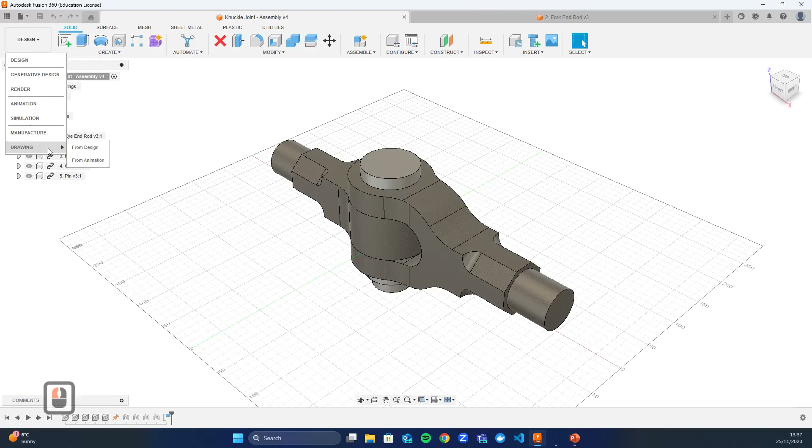For that, open the part, essentially the assembly, then go to design, and from there we'll be changing the workspace this time and going to drawing. You can see that you can make it from animation or design, but for now we'll just make it from the design. Let's click on design.

Then you see this dialog box, which asks you what do you want to make the drawing for. So we'll go ahead and click on full assembly. We'll be starting a new file. I have provided a template in the resources folder on the learning room, so you can use that.

It's called drawing dash template. But for now, I want to show you how to make it from scratch. So in this video, at least, I'll be showing you from scratch.

So there are different standards. We'll be using the ISO, we'll be using millimeters as dimensions, and for the sheet size I would recommend to use A3. So let's click on OK.

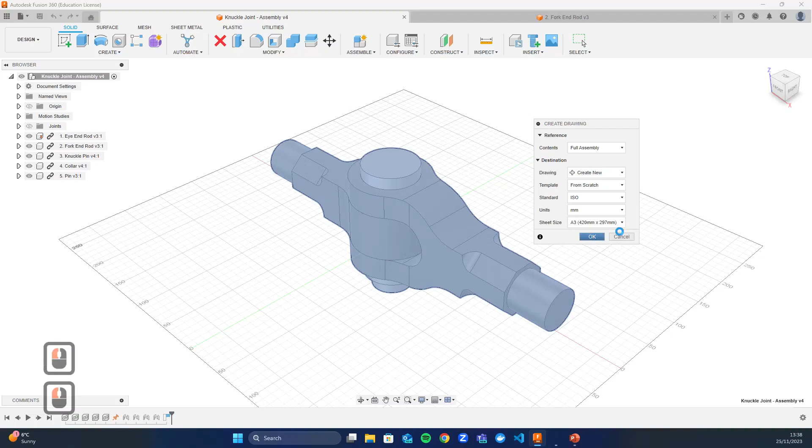One thing to observe is that Fusion opens a new file, an untitled file. So this doesn't actually happen inside the original design that you made, but Fusion opens a new file. And the very first thing Fusion wants you to do is to put the part wherever you want it.

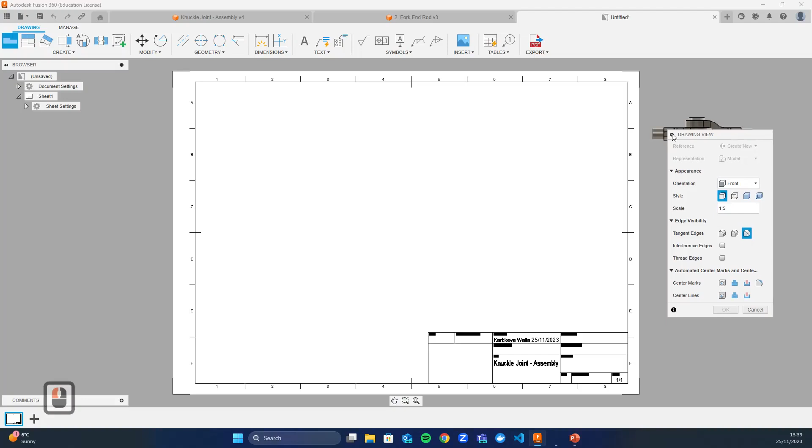You can put this view if you want, which is the front view, as you can see from here, or we can also change the view. So let's go ahead and use an isometric view for now. Let's see if we can use that one. That looks fine to me.

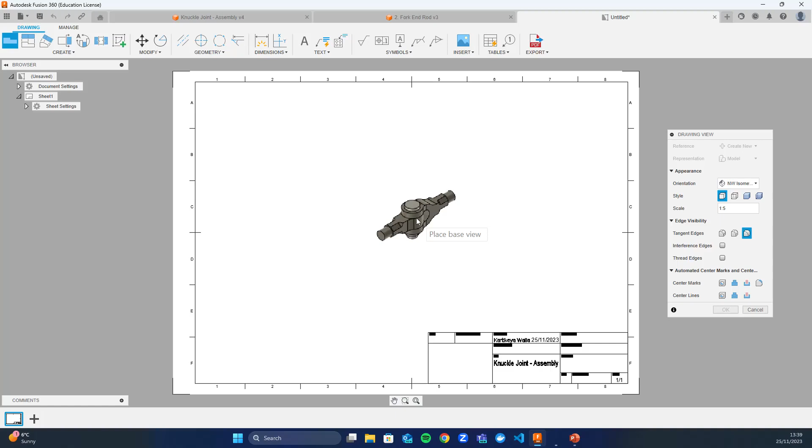Also, this is very small, right? Because over here, if you see 1:5, that just basically means that we are seeing all the dimensions 1/5 of the original dimension. So let's go ahead and do it 1:2. That makes it a little bit bigger. Looks good, so let's go ahead and click it.

Once you've clicked, the position is fixed, and then you can click on OK. Again, you can modify all of these things, so there's no worry that if you've done it once, you can't really change it. If you double click on that, that box comes back and you can go ahead and modify things. So just one thing to notice is that there are different kinds of styles as well that you can use.

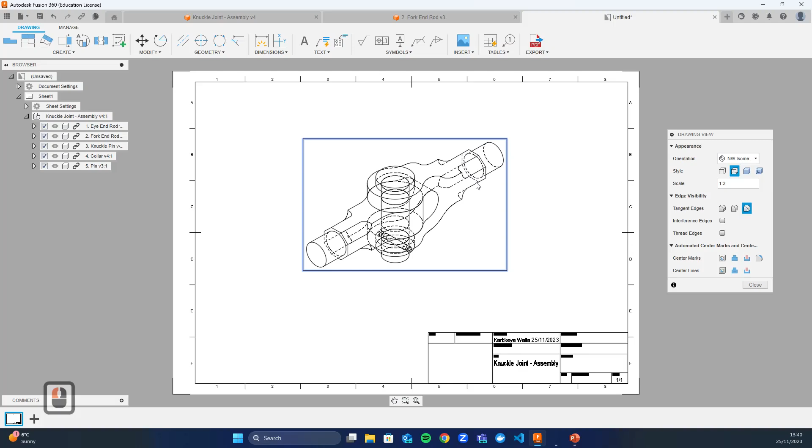We use the visible edges. You can also try visible with hidden edges, which for at least the assembly is looking very complicated. Then you can just do the shaded one, which is nice if you have some other views as well. And you can do visible and hidden edges with the shaded one.

For now, we will use just the normal visible edges. Feel free to explore the other options here as well. Okay, so let's close that.

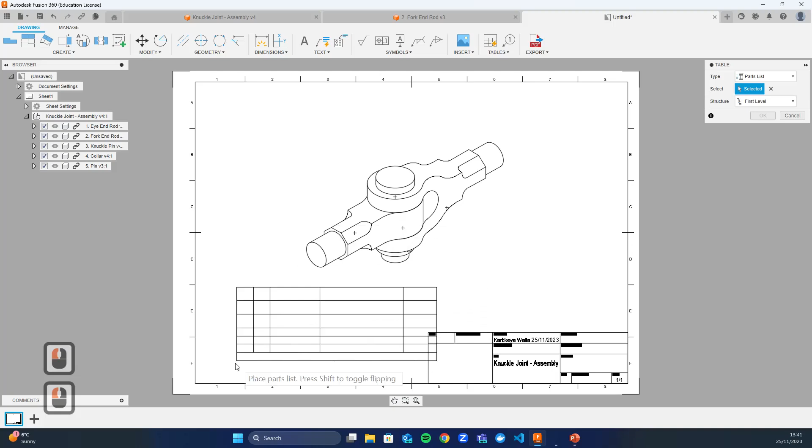The next thing we need to do is to make a bill of material. And for that, you can very easily click on tables, and from there you can select parts list. It basically hovers and sticks a table to your mouse.

You can click anywhere, and because we've been saving the files with the correct names, we have also assigned the materials. But right now you see that it's not — I think it's upside down. For me, parts list should be on the top. So we can fix that.

If you double click on the table, you see the parts list dialog box. You can set the table direction to down, which fixes that immediately.

If you want to write description, you can, but it's not required. Then you can show the mass of the parts as well, which is optional again, but I would suggest to have the item, quantity, part name, and material.

So let's get rid of some of them. We'll keep the item, we'll keep quantity. We don't necessarily need part number. We'll have the part name, which is exactly what you've saved the file names with. So maybe it's a good idea to change the names without these digits so that it makes more sense.

And you can also change where you want, like, quantity to appear, so you can have the part names first and then the quantity. You can close that, and also modify it a little bit so that it looks nice, and you can move it around. Very easy to do this.

The next thing you should notice is that it has put these balloons on the part, right? And these are basically showing that this item number, which is 1, is essentially this part. The second one is over here, which is the fork end.

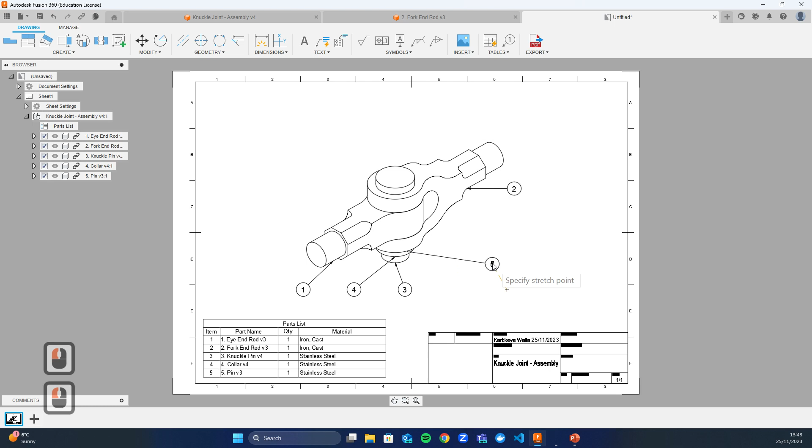Very easy, pin is marked, so 5 is pin. I like to keep them nice and straight. You can keep them at an angle, there's no problem to that, but it just looks better if they are straight.

Knuckle pin can be at the bottom, there's no real problem. So that is the assembled view. We'll come to the title block. This is called the title block, and I'll show you how to make that itself, but essentially I wanted to focus right now on the bill of material.

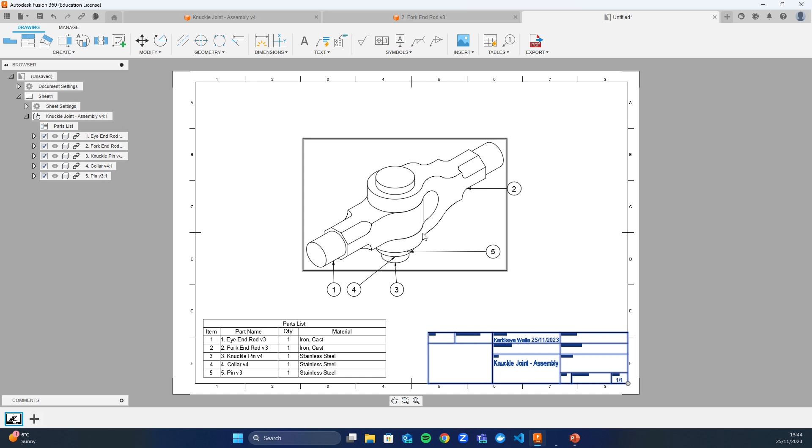Very easy to make if you've followed the process we've been doing, making all the parts separately, assigning the materials in the assembly. You've imported them by right clicking, and if they are linked, you should have no problems making the bill of material. If this doesn't work, you can always make a custom bill of material where you enter all these values yourself, and you can also put balloons and all that. So that should be very easy to do.

One more thing before we go to the title block is we can actually move this around, so that shouldn't be a problem, and we can import more views if we want.

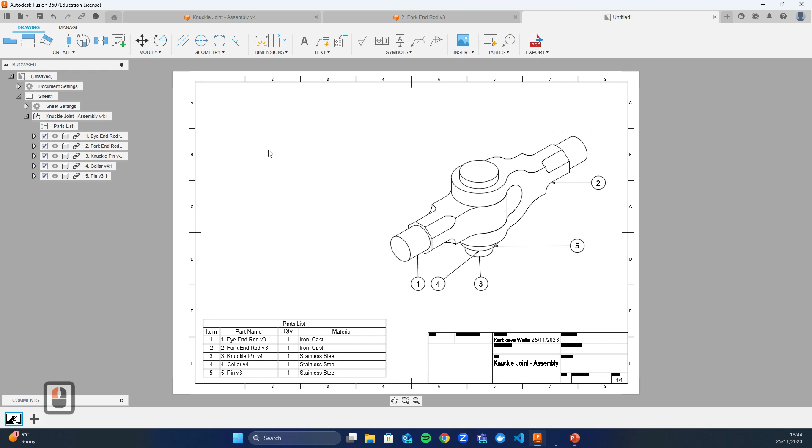For that, what we will do is click on base view, which brings up the initial sketchy view we got when we started a drawing. We don't necessarily need it for the assembly, we just need enough views that makes it clear that this part is that.

Sometimes it is a good idea to have separate views, but I just wanted to show you how to import it. So let's go ahead and make it 1:4. So this is the front view.

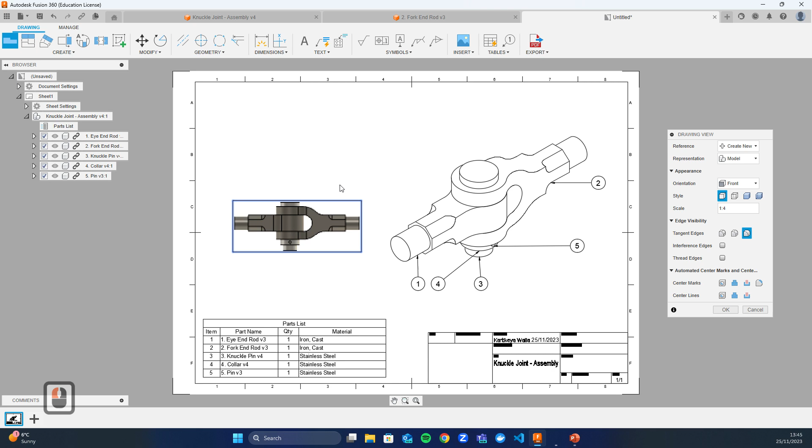If we are using the third angle of projection, this time let's do it with the hidden edges. And if you remember from the previous classes, if this is the front view, where would the top view be? Take a second and guess. So in the third angle of projection, the top view is on top.

If you want to make any view from an already existing view in your drawing, for example this, if I want to make a top view, what I need to do is click on projected view, and wherever I click next, the correct projected view will be put. So even if I go at an angle, I can have the isometric view as well.

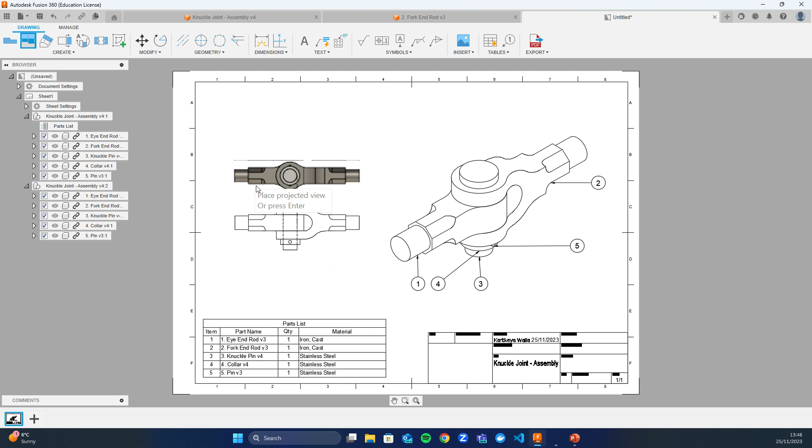So for now I'll just hover on to the top. Also make sure that it's aligned properly. Actually Fusion snaps it itself, so it shouldn't lose the alignment, but you get the idea, right? So you can make the top view just like that, and also the side views.

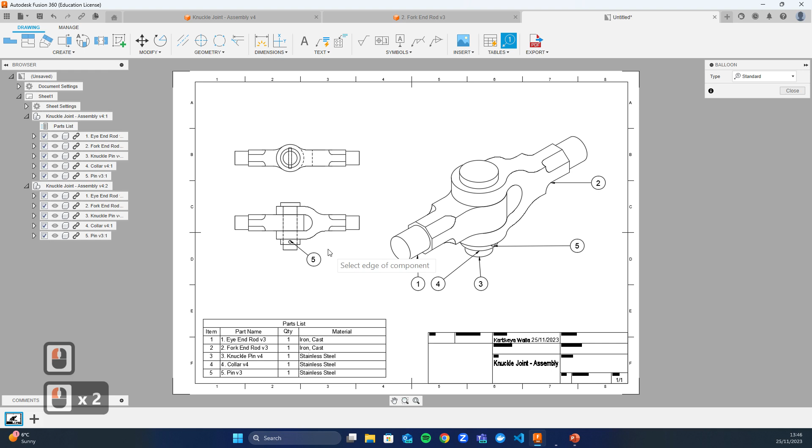You can put more balloons if something is unclear. For example, the pin is not very clear, so we can have another balloon which shows the pin very clearly. Feel free to explore this.

Without wasting any more time, let's go ahead and I'll show you how to make the title block. Title block is basically another table that shows most of the information about the drawing. We can modify this block, or we can start a new block. I have already given you a template, so if you want to make changes, you can just modify that. But I'll quickly show you how to modify an existing one.

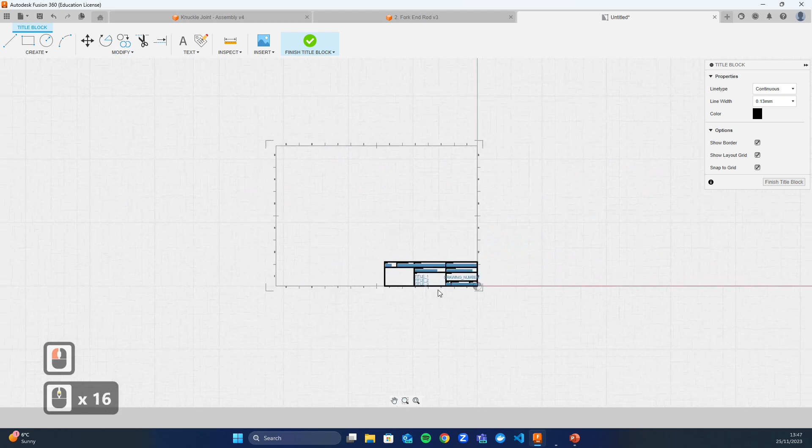If you right click on the existing title block, click on OK, it takes you into a design workspace where it's as simple as making lines. For example, if you want to add more rows, you can just click and add straight lines. If you want to import some images, for example a logo of Nottingham Trent University, you can do that, and you can change the scale of that.

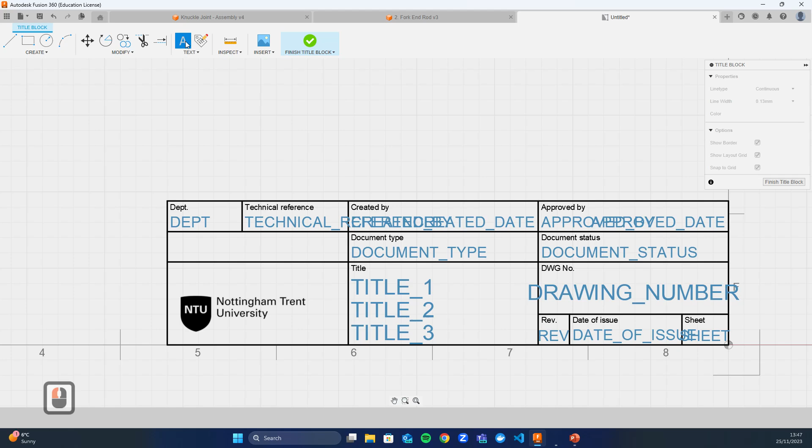And you can make changes as much as you want. You can write text, we can write the scale, yeah? So scale is another thing we should mention in our drawings, and we have used 1:2 for this case. So you can make changes to this. You can write the title of your drawing and then finish the title block, and the changes you made should appear over here, right?

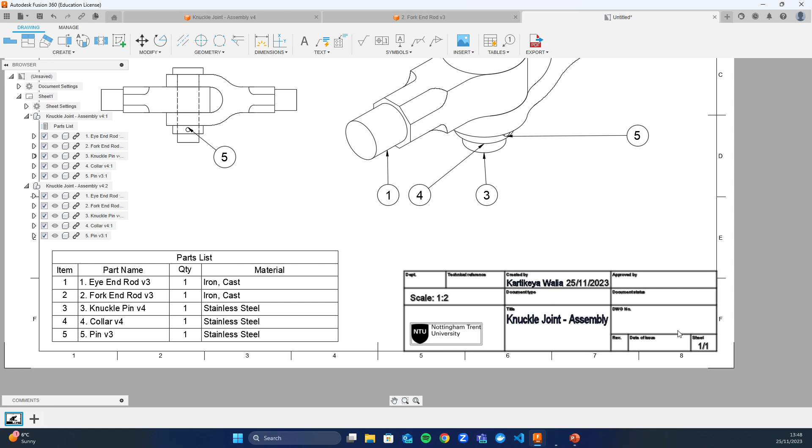Please make sure that you fill all of this information before you actually export the file as a PDF. So that's the final step. You can save the file, obviously, remember to save it, right? So I'm going to save it as this, and then you can go ahead and export it as PDF.

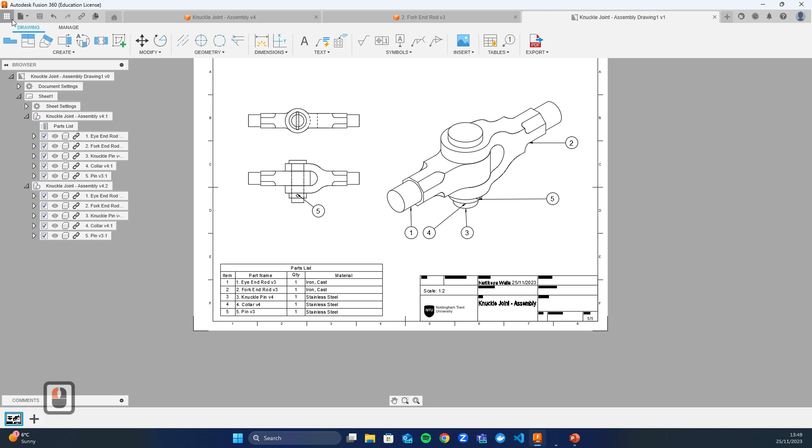I already did one before this, so I'll quickly show that to you. Yeah, so you see, I've got an isometric view as well, and I've got the three orthographic views. I've used, which angle of projection is this? Third angle of projection, hopefully you can remember it very easily now. This title block is already there in the template that has been provided, so feel free to use that.

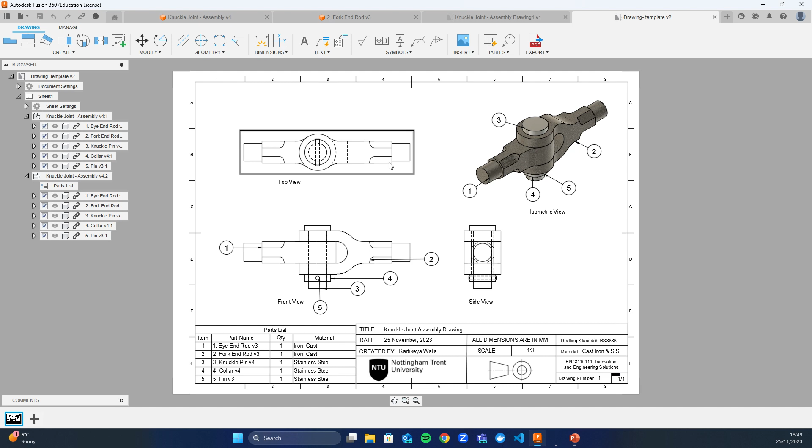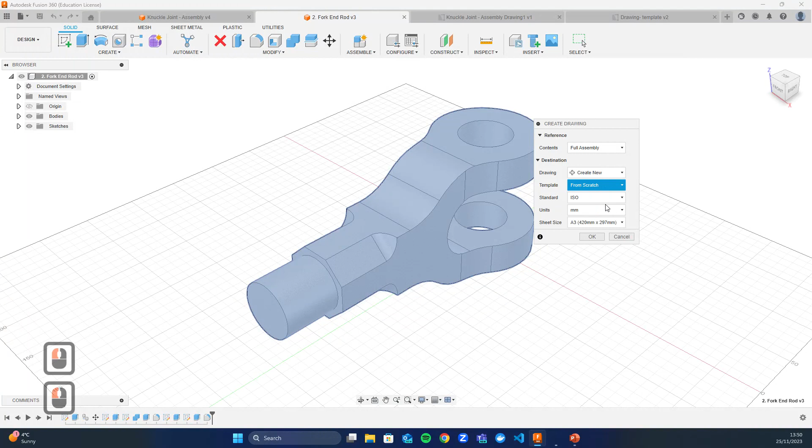Okay, let's go ahead and make a detailed drawing this time. For detailed drawing, we need one single part and not the assembly. So when you made individual parts, you can just come over here, on an individual part, same process. Go to design, click on drawing, from design. This time let's use the template instead of from scratch. I'm going to use the template. Click on OK.

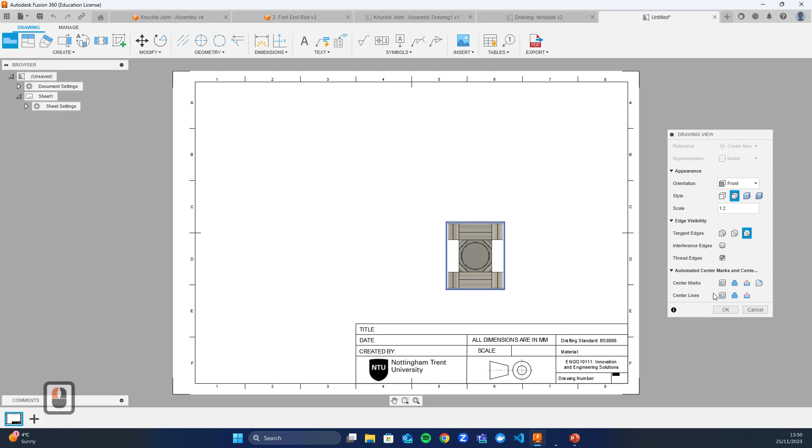Just wait for Fusion to load it. Obviously, we can make it bigger. Let's try a scale of 1:2. Even though it says front view over here, I know that this should be the side view, so I'm going to click somewhere over here and press OK.

Let's quickly make the projected views - very easy. Click on the projected view, click on any existing view, then just click again to place it. Okay, and now I will use this to make the top view. That's my top view there, right?

You can also use the text over here to write the name of the views. It is a good idea to mention it in your drawings. Once you've got that, you can copy paste it and write the names of the other views.

One thing to notice is that you don't really need the bill of material for an individual part, because it's just one part, so why would you want to make it anyway? But I just wanted to mention that.

Okay, so we've got some of the things done. We can actually import a nice isometric view as well. So let's go ahead, use the shaded one, change it to 1:2. Hopefully it will fit.

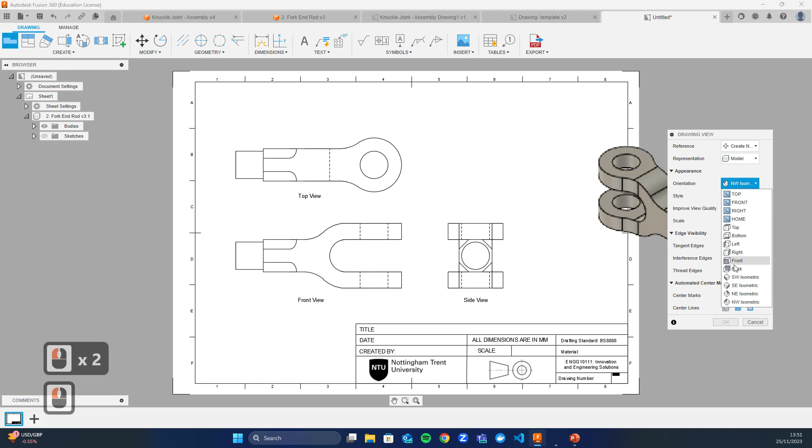Let's make this one, or maybe another. Okay, yeah, so you can put it anywhere on the drawing. You can also write isometric view under this, which is a good idea. So let's go ahead and fill this title block quickly.

This is the fork end. Let's go ahead and click OK. I think that should be fine. Oops.

The date for this recording is the 25th of November, so I'm going to put that. And you can fill the rest of the things as well in the same manner.

Do you remember which scale we used? 1:2, right? Okay, let's do that. You can mention the material as well, because every part has its own material, so you can just put that one here. This one is cast iron.

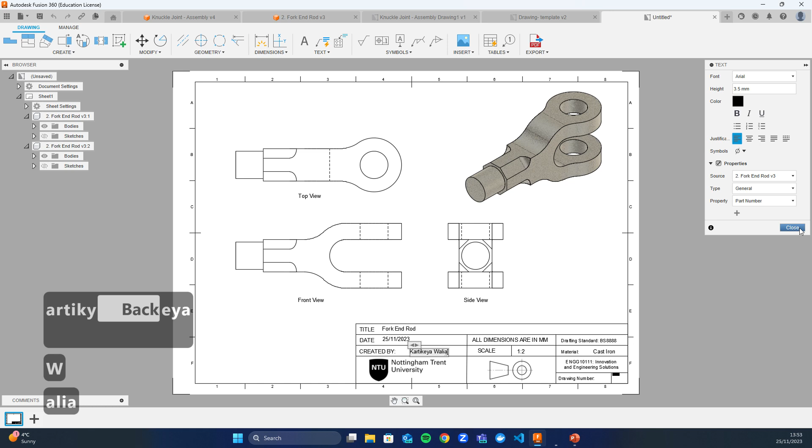I'll put my name here. If you're working in a team and if you're writing it for the assembly, you can write the team group number as well if you want.

Start putting the dimensions in. What I want to point out is that make sure that you are using the third angle of projection, because the default image over here is for the third angle, but feel free to use the first angle as well if you change this symbol. Don't use first angle of projection if you are not changing this symbol over here.

Okay, so quickly to show you how to change the angle of projection when making a drawing. Let's say I've got this drawing where I've got a flat front view, the right hand side view has a hole in it, and the top view has the text 'top' written on it so that we can clearly identify it while making the drawings. So I'm going to make a drawing from this. Use ISO for now, let's click on OK. First thing is that we just put the front view anywhere we want.

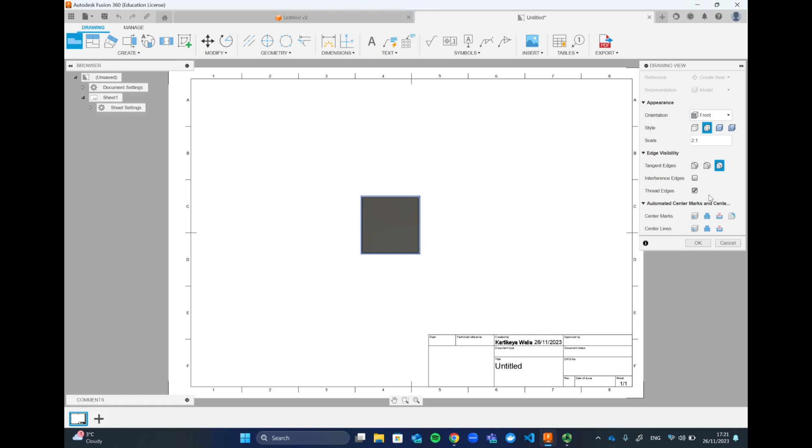And let's do it with hidden edges so that we can see everything. So that's our front view. So let's go ahead and make the top view. We need to first figure out if the drawing is in third angle or first angle by default, and to do that we can quickly make the top view. So let's make both the views here.

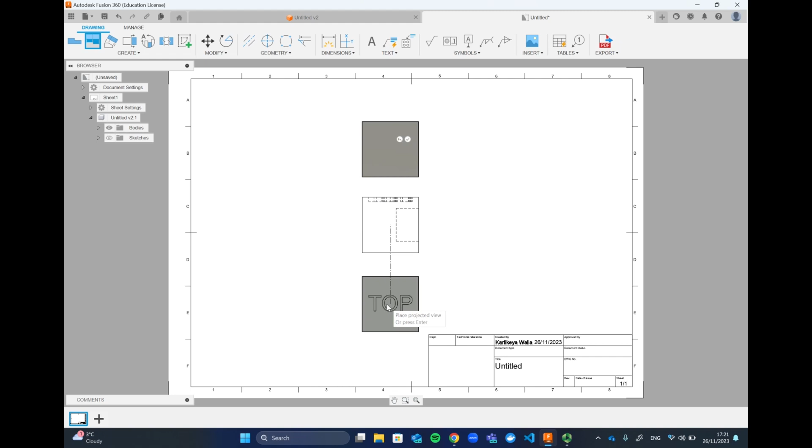And what we see here is that the top view actually comes at the bottom of the front view, right? We know that this happens when we are in the first angle of projection. So this is the top view, this is actually the bottom view. We can also check with the right hand side view.

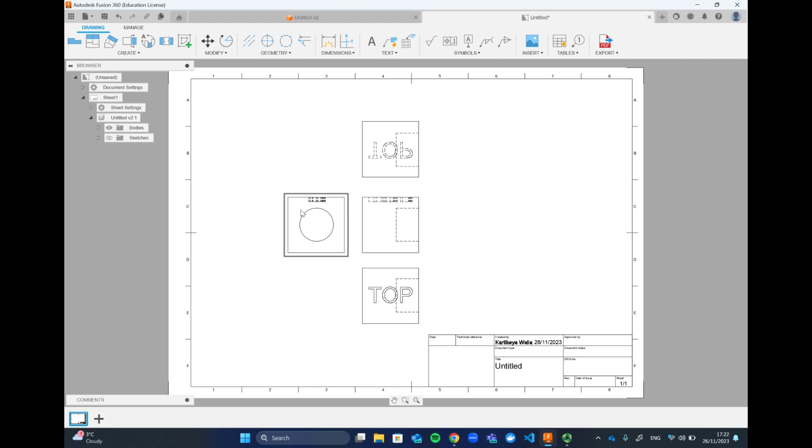So for the first angle of projection, if I want to see the right hand side view, I will actually have to make it on the left hand side. So that is my right hand side view. That's why the circle is, I can see the circle as a proper circle and not a dotted line. And my left hand side view, which should be on the right, will have a circle shown as a dotted line. Also we can just make sure that if we do it without the hidden edges, we can't really see the circle, right?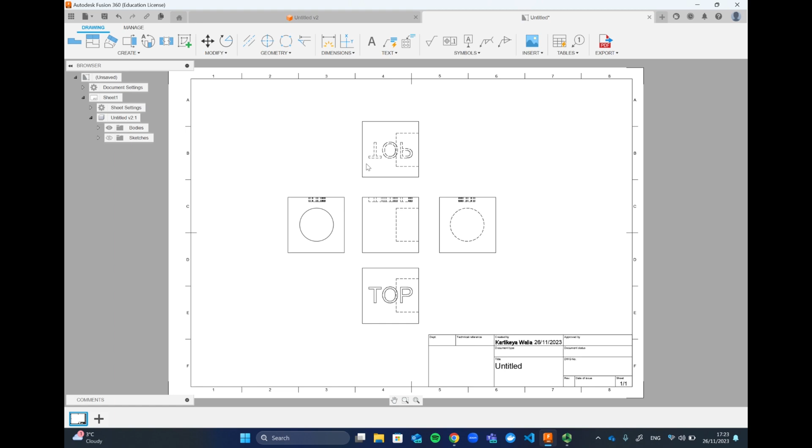So we've figured out that we are in the first angle projection, but we want to draw in the third angle of projection. If that's something you want to do, obviously you would put the correct symbol in your title block, but we also need to make sure that we are drawing in the correct view, because Fusion would not know itself which angle of projection you want to use. So we've figured out that the first angle of projection is the default that Fusion uses, but we can change it.

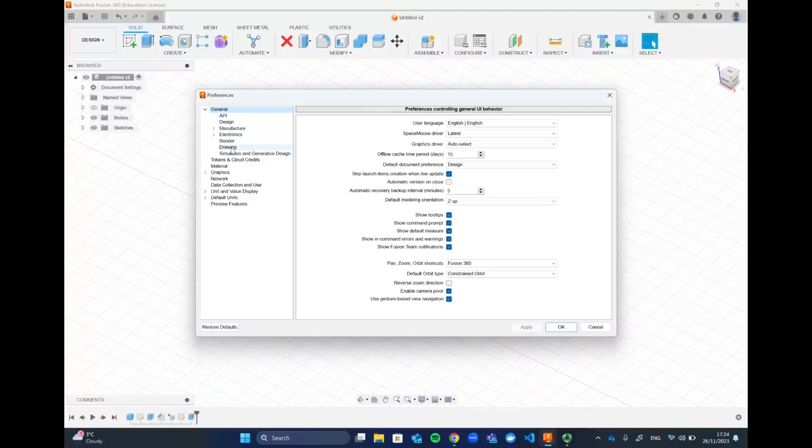So for that, you will first have to close your drawing, because this setting has to be done before we actually start the drawing. Then you click on your picture, go to preferences, and go to drawing. So general, drawing, and this is where we need to make the changes.

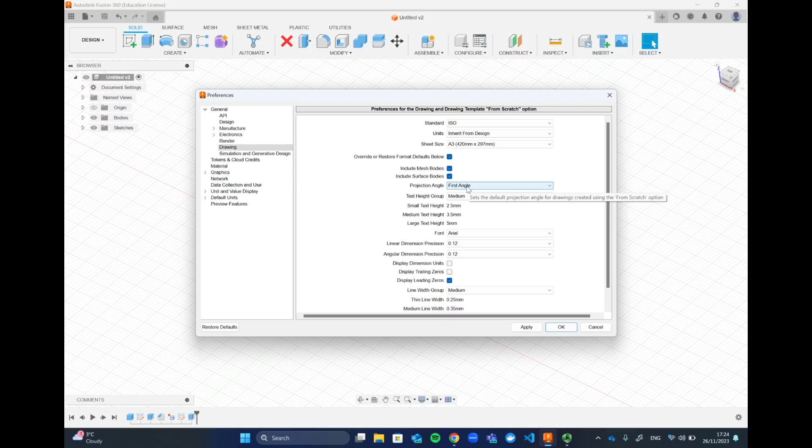Right now the standard is inherit from design. Let's go ahead and select ISO. If this setting is unticked, you have to tick it first so you can make changes. Over here you can see the default angle of projection is first angle. Let's go ahead and change it to third angle, and if you press apply and OK, and now if you make a new drawing, make sure it's ISO over there.

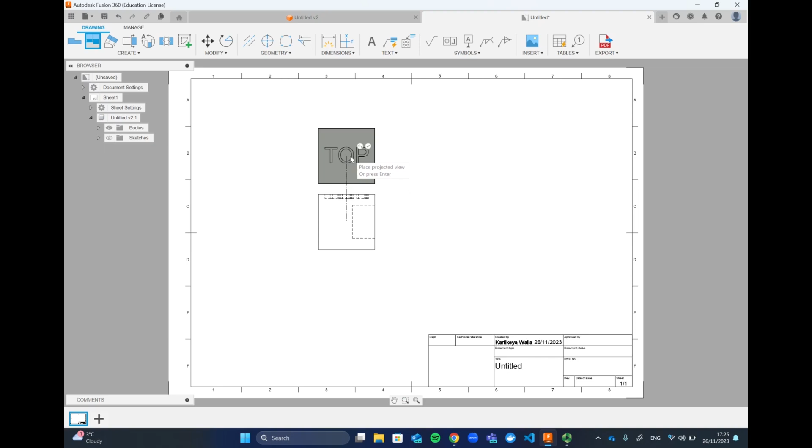We can very quickly see if the changes have taken place or not. So let's go ahead, make the front view again, and try and make the top view again. And voila, this time the top view is on the top, which means we are now in the third angle of projection. We can also make sure this is the case by making the right hand side view, and if we see the full circle instead of the dash circle, we know we are in the third angle of projection.

Another thing that I want to show is the drawing number. So what is a drawing number? For example, if you are making 5 different parts and you're making 5 different orthographic projections or detailed drawings for all of your parts, let's say the eye end is basically the first drawing. This would be drawing number 2.

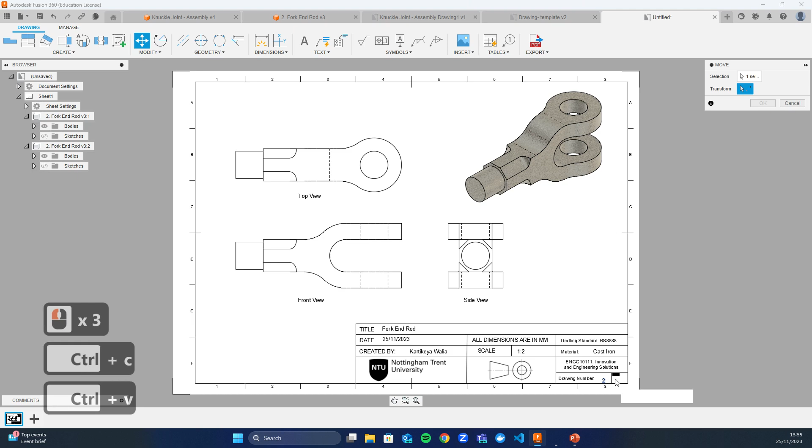What you can also do is mention - this one is not very visible right now, I'll zoom it in and then you can see - over here you can see the other one is called sheet, and this lets you write how many sheets you've got and which one you are currently on. So I've got a total of 5 drawings and this one is the second one.

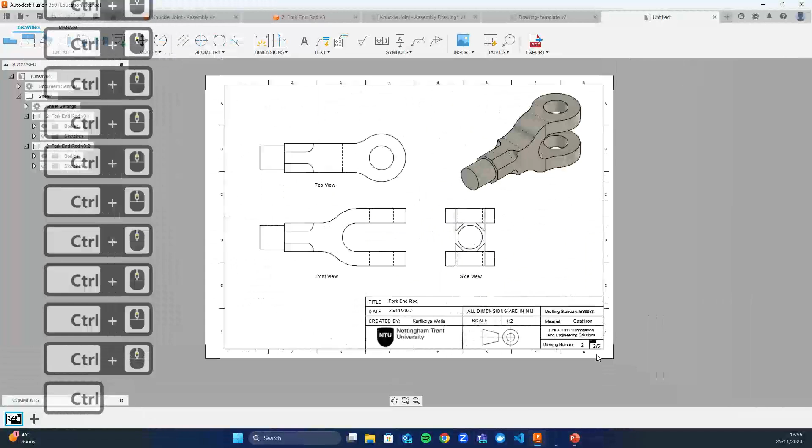Once we've got the title block sorted, the next thing we need to do is make sure we give sufficient dimensions. Let's have a look at how to give dimensions. We will be using the dimensions tab for that.

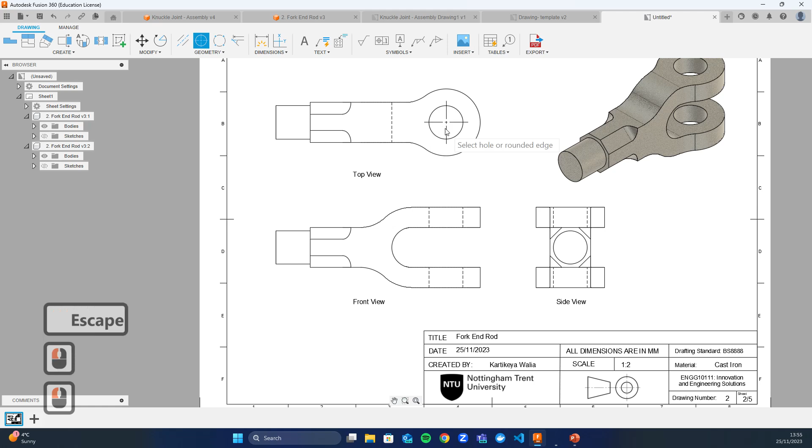Before that, it's a good idea to put some center markers. For example, it will be a good idea to mark the center point of the circle, let's say. So you can go to geometry, click on center mark, and mark that. You can mark the center mark for this one, and also for any of the major curves in your drawing. Also, you should mention the center lines for holes.

So we know that in this part, we've got this as a hole, and this is also a hole. This basically helps in understanding the drawing and also in referring when you're putting the dimensions.

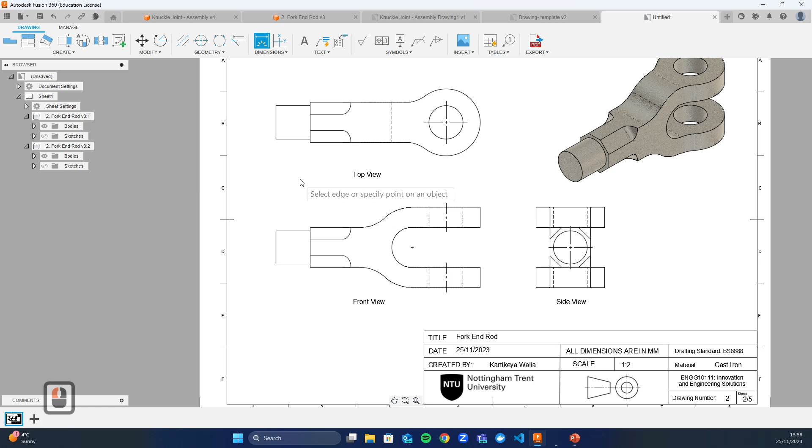So there are a couple of ways to do the dimensions. There is one command called dimensions, which is sort of automatic, and it decides itself what is the best dimension according to where you click on. For example, if I click on this circle, Fusion can detect that I would essentially want to put a diameter over here, but it works most of the times, not always. That's the reason there are other commands as well.

I'll just show some more dimensions to you, and then, because it's more or less the same, you can do it yourself. So you can mark linear dimensions, select 2 points, mark it. It's always a good idea to make it as clean as possible, so if you're marking the dimensions, make them aligned.

We know that we need to specify how big this extrusion is. We should specify this end cylinder, right? Let's also give some more dimensions.

For this case, I've used the automatic one, and you see that it's not really working. For cases like these, when Fusion thinks that an angle dimension would be the correct one, you can actually do it manually by using linear dimension - select the center point, select that point, and then it should allow you to put the dimension as a linear dimension.

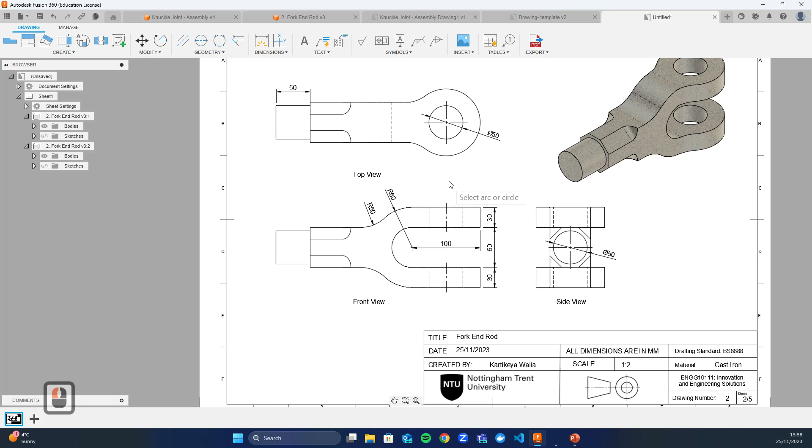Okay, so this is not complete. You would need to give more dimensions. For example, you can give radiuses for the radius of curvatures. We've seen this before because we actually followed a technical drawing for this, so most of the dimensions were there, but this is how those technical drawings are made.

Hopefully you got some idea how to make a drawing. You can also explore the tolerances, and we will discuss that in the next term, but if you want to go ahead and explore it yourself, feel free to do that. I'll just show that if you spend some time and do it properly, you can make a drawing like this, which has all three views: top view, front view, side view, also an isometric view, and the full title block as well.